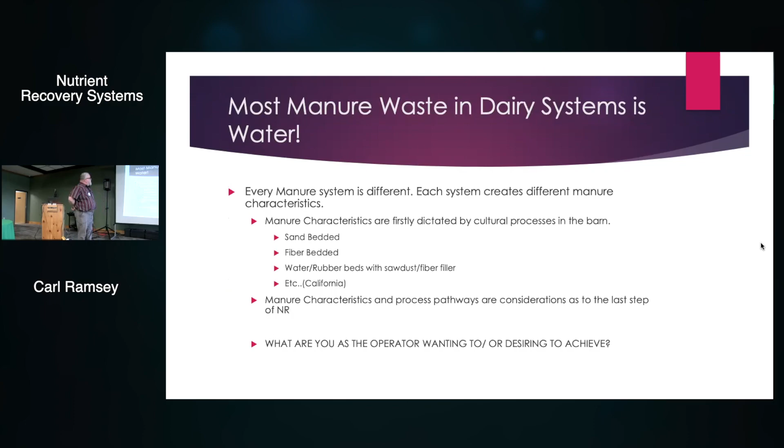The question: to digest or not to digest. Digested manure has had the mucoid structure broken down, making it easier for certain nutrient recovery systems to function. Digesters break down that structure, breaking up the volatile fatty acids, the starches and the sugars, and it allows that liquid to be less viscous after the digester.

Nutrient recovery systems don't want to get slimed up, and certain systems are way more susceptible to it than others. Digesters also serve, and a lot of guys forget about this, as a giant mixing tank, because that's what they are.

Nutrient recovery systems want a very homogeneous feed, because things happen culturally in the barn that change the feed. So if you don't have a digester working as a big blending pit, or a big reception pit doing a good job of blending, and you try feeding it, the difference in just 2 or 3% solids can really mess up your nutrient recovery system. That is also a big benefit of a digester.

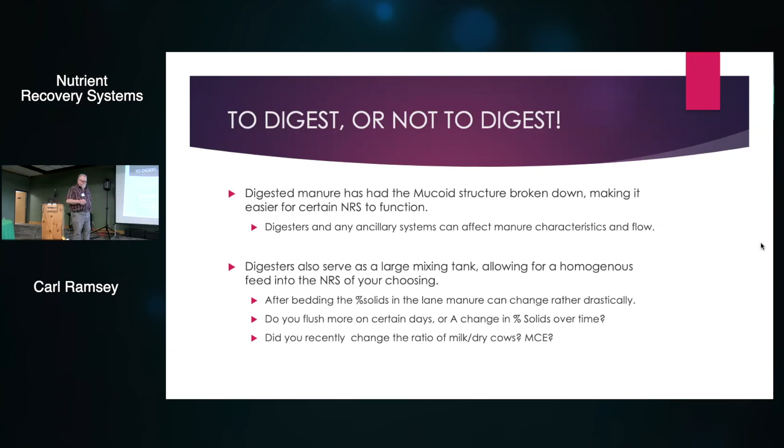The other thing that needs to be decided is how individual process ownership affects the operation as a whole. As companies become aware of what we're doing, they want into our space. The big fuel companies want into our space. Concrete companies want into our space. Trucking companies want into our space. Green investment companies want into our space. Fertilizer companies want into our space.

One of the most common questions I get from people all across the country is, how do we get all these processes to work and not fight each other? Because in a system, you could own the cows, own the digester, own the nutrient recovery system, and own the gas upgrading system. The dairy farmer just wants to get his manure out of the barns or pits to the digester. Well, if the digester isn't running right or isn't being fed at a consistent rate equivalent to what the dairy farmer needs to get rid of, then we've got people upset.

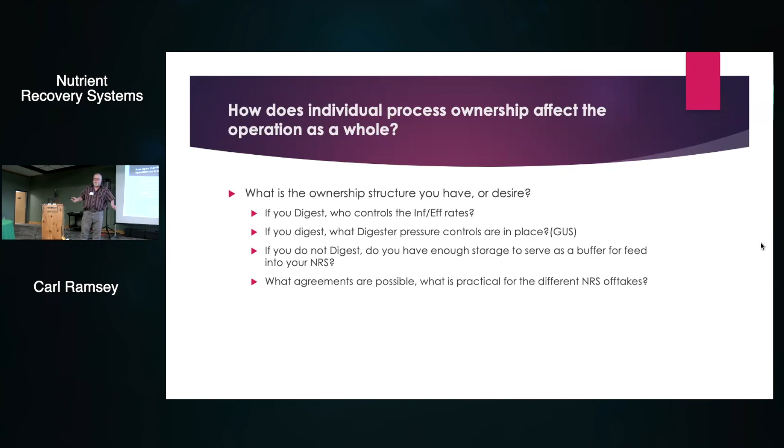And that surge definitely messes with your fiber recovery system. It definitely messes with your nutrient recovery systems after that. So what agreements are possible, what is practical for the different nutrient recovery systems and their off-takes, because again, somebody else could own the nutrient recovery system.

So here's a few in my discussion. I don't know that I hit them all, because our technology today — computers 20, 15 years ago were changing daily and upgrading daily, well now we're in that world with nutrient recovery systems. The technologies used, the off-takes, how we get to where we're getting, it's changing by the day. So I may have missed a lot here. I'm just going to do the best I can.

Micro nano filtration technology, so FO, RO, UF, flocculation, DAF technology to MD presses or centrifuges. That's what we currently are running and have been for a few years. Centrifuges without polymers or flocculants — there's a lot of them being ran. Centrifuges with polymers and flocculants — a few people mess with those. I myself don't like them. Belt or plate and frame filter presses, staged lagoon variations, ammonia harvest to liquid ammonium sulfate, the new Varcor systems.

Hybrid systems that use components together to make a tailored process — one of the systems I'm going to show you is a hybrid system. And then biochar technologies. Folks, that biochar thing is a big deal. I don't know, and there's a lot of smart people that probably do know, but biochar could make a big difference in a lot of ways in a lot of places.

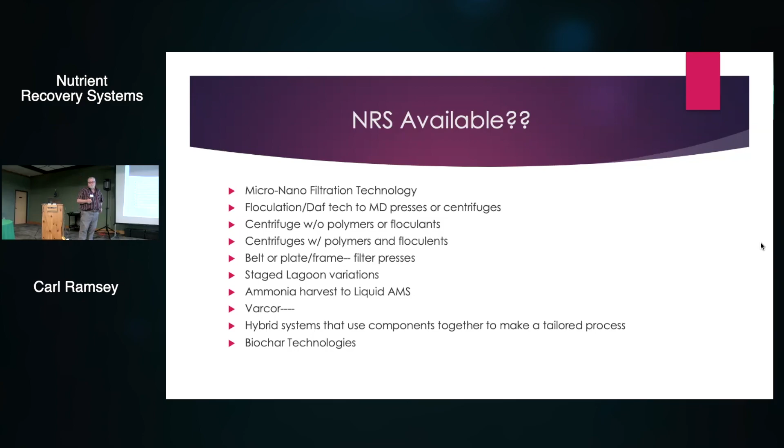So the only thing I can talk about is what I have some experience with, the only thing I feel comfortable talking about anyway. We set out back in 2003 trying to separate phosphorus.

In that process between 2003 and about 2014, we were always running DAF tanks, maybe not very successfully. But in there somewhere, we decided to add a centrifuge to deal with my DAF float, the DAF sludge. It was the worst 18 months of my freaking life. But I'm not going to say it was all the centrifuge's fault, because trying to pump air-entrained manure — and many of you didn't even know that was a thing. I didn't know it either.

But trust me, trying to pump air-entrained manure is very, very difficult. We couldn't find anything that would give me a consistent flow, because every time you tried to pump that stuff and that air-entrained manure was met with any kind of force, rotational force, down force, what happened? The air was trying to escape. When the air tried to escape, the manure went everywhere except for where it was supposed to go. So anyway, again, I hate our experience with centrifuges. A lot of people have no issues with them, and that's probably because they're doing it right, and they're probably not trying to pump air-entrained into them.

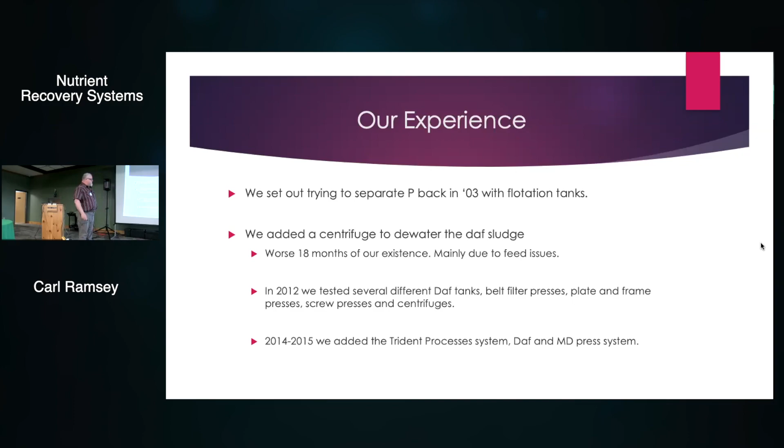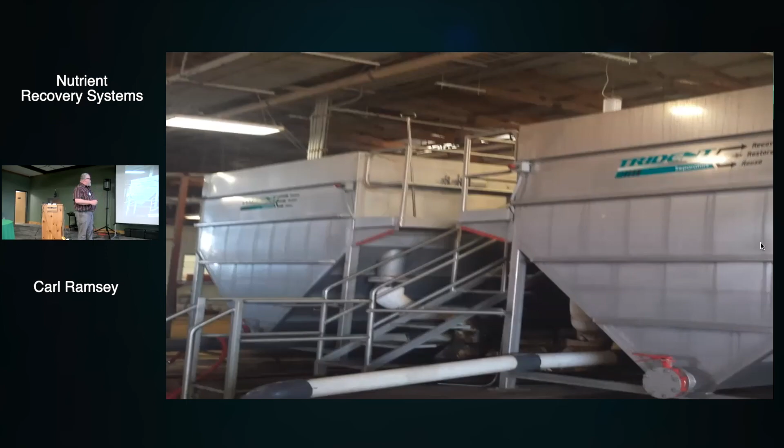In 2014-15, we added our Trident process system, which is a DAF and MD press system. There's a blurry picture of that, and I thought it looked really good when I put it on there. Then I made it a little bigger, I guess, and now it looks really bad. That is about my eyesight, I guess, but still.

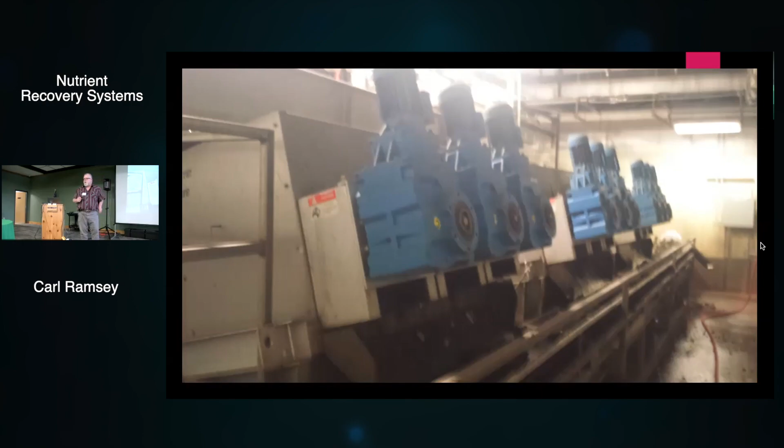These are the MD presses. We went with MD presses to dewater the DAF float for a couple of reasons. There are 9 MD presses, for a total of about 18 horsepower. To dewater the sludge I create every day with the DAF tanks, it would take about 500 horsepower worth of centrifuge. I'm doing the same job with 18 horsepower, saving over $250,000 in electricity a year by using these MD presses.

MD presses don't get a little wobble and shut down. It takes 45 minutes to shut down. MD presses are very consistent. Okay, I like them.

We take that cake that's being made to the north end of our farm, to a fertilizer plant. We agglomerate that nutrient cake with conventional ground fertilizers, and we create a homogeneous blended fertilizer, marketed now with Gypsoil, which is the name of the company that's marketing that stuff.

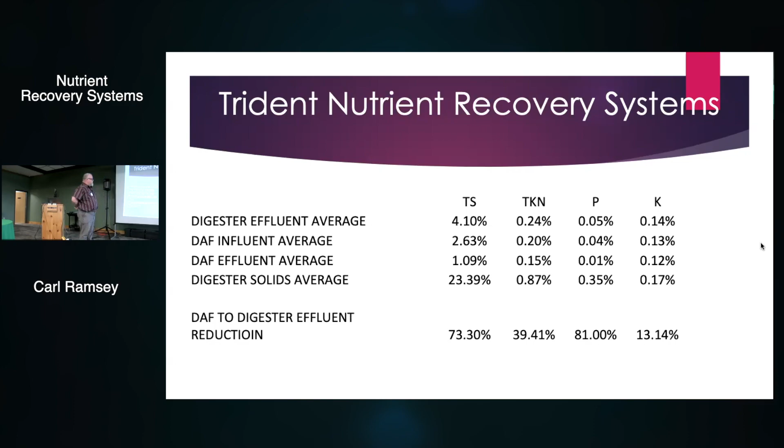One system that has been tested at our facility quite a bit is a digested organics filtration system. They've come in and set up after our DAFs, so they would take the DAF effluent and run it through their systems - UF, ultrafiltration, stainless steel tubular membranes. They get really fancy with the slide they sent me. No internal moving parts, 10+ year membrane life.

They've been successful at it at a pilot level. They're building a huge facility in Wisconsin as we speak. I believe, and you folks may know different, this is the group that got the first discharge permit in Wisconsin. And that's a big deal. Okay.

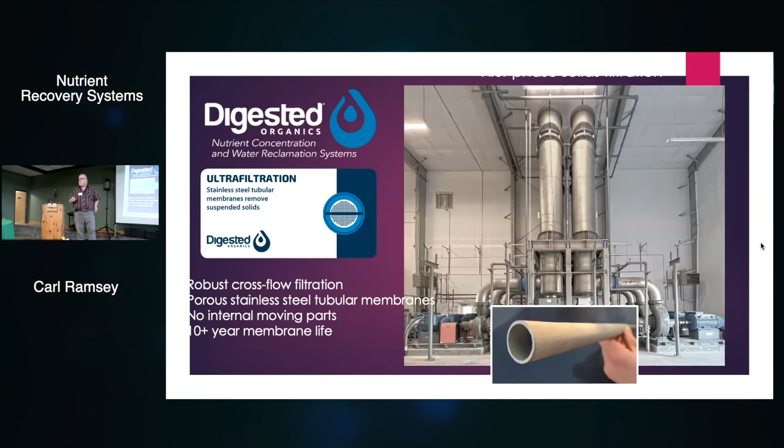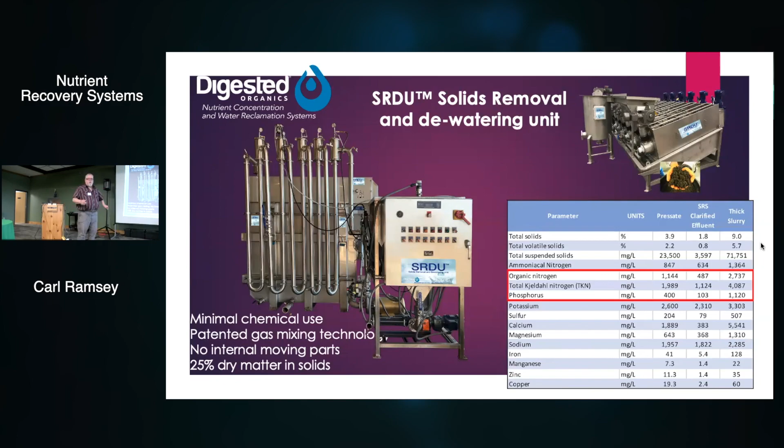Again, you talk about hybrid systems over there in the corner - they call that the SRDU, solids removal and dewatering unit. What that is, is a floc tank hooked to those MD presses so that he can kind of do the same things my DAF tank does. There's a picture of a guy holding the nutrient cake, and then they take the pressate from the MD presses and run it through all of their RO, FO, UF filtration technology. Again, removing 99% of molecules.

Greater than 1 kDa, whatever that means. I really should have looked that up. But I think that's pretty small. Okay.

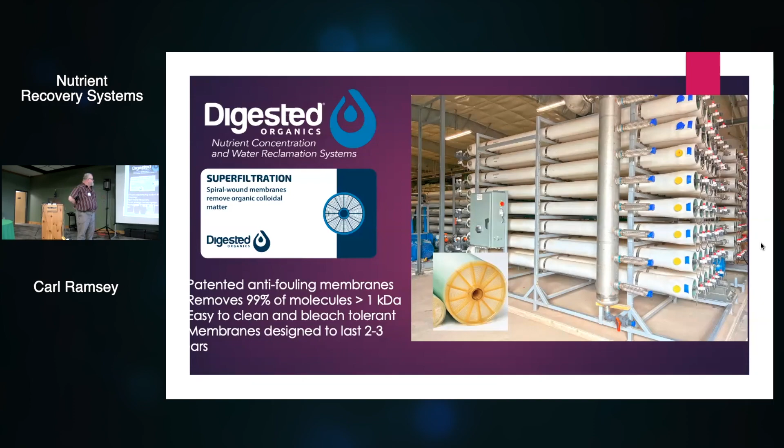So again, I think that's a picture of one of their systems, sub-induction time reverse osmosis. Here's a picture, unique sequencing batch RO technology, okay? Very high water recovery. And here is a picture of the different levels.

And I have drank that water. So they're removing nitrogen, they're removing the potassium and the phosphorus. It's a total nutrient harvest system, and they can create drinking water with their system. Is that what you want? Is that what we need to go to? Time will tell.

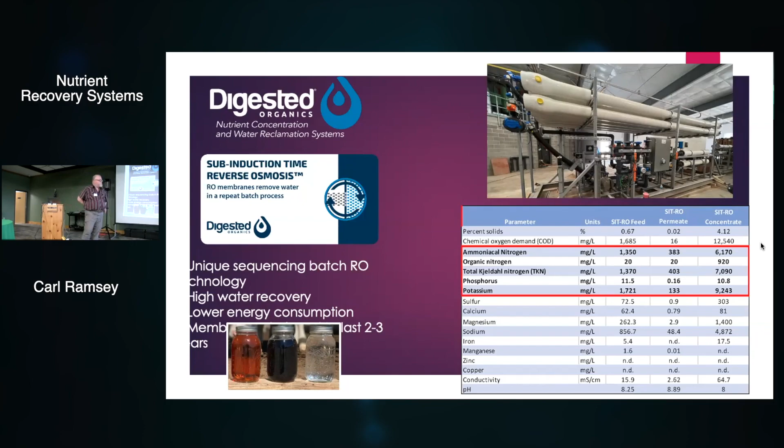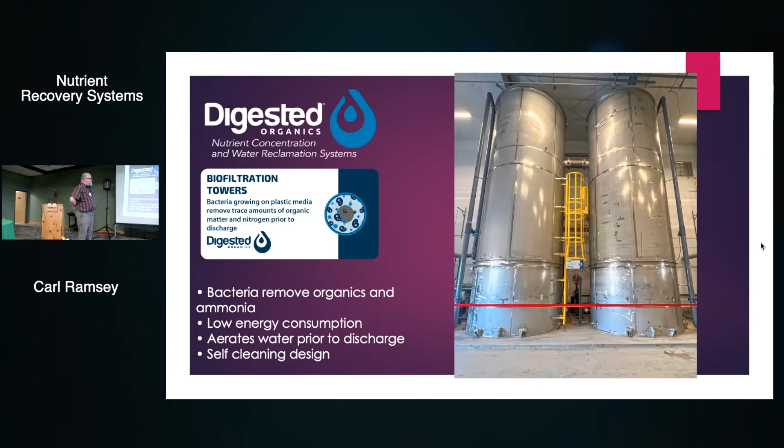There's their ammonia recovery system. It's a stripping tower system with media in there. Everybody's media is different - it could look like little wiffle balls, or it could look like the plastic golf balls, practice golf balls you use. You're looking for exchange sites on the media. Theirs is a self-cleaning design, which is fantastic.

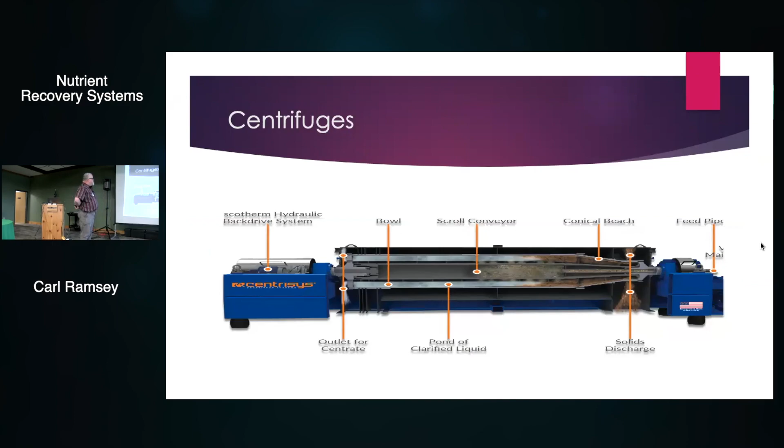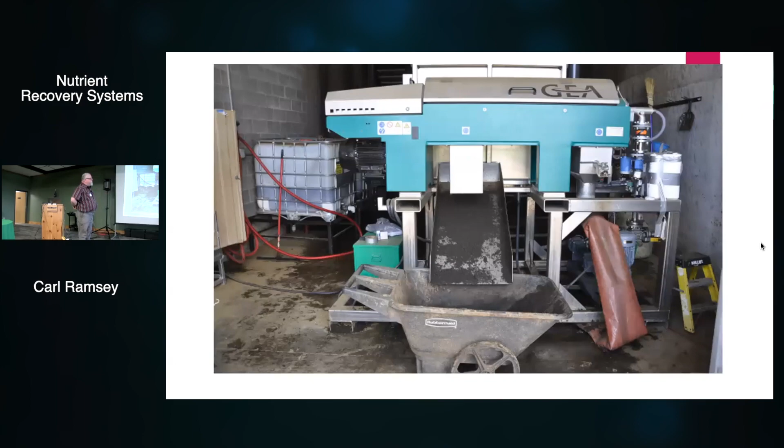Now we talk about centrifuges as one of the options. Okay. This is just a general picture of centrifuges, how they're fed, and it's all about G-force. Here's a GEA centrifuge - I'm not sure what farm that's at, but it's probably one of our sister farms.

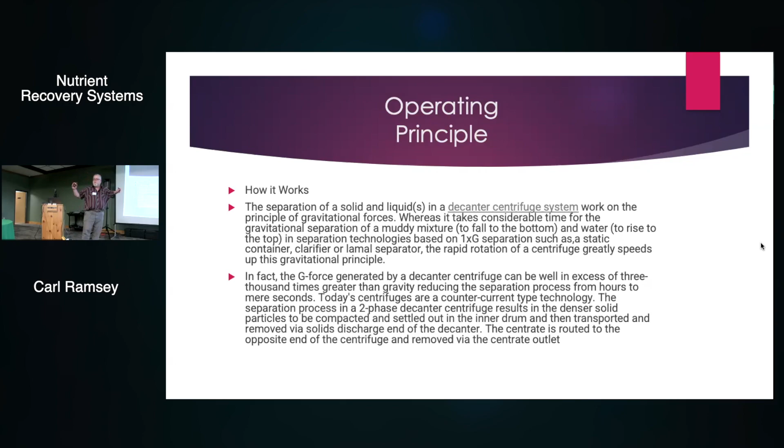You add either polymer or ferric chloride depending on your parts per million, and you can bring that number up. Running a centrifuge with polymer, you've got to use a lot more polymer than what we'd use on our DAF tank systems, because the shear messes with the polymer. It makes it a little bit cost prohibitive.

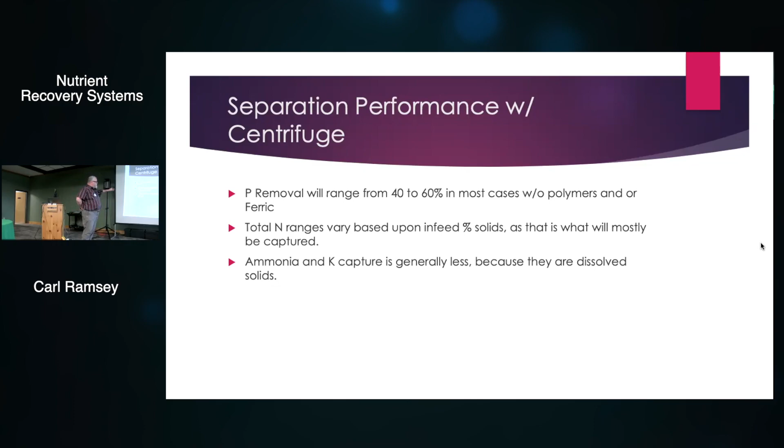Total N ranges vary based upon the in-feed percent solids, because you're generally just capturing the solids, so it would be the organic fraction of nitrogen, not the ammonia. Ammonia and K capture is generally less because they're dissolved solids. I said that a couple different times in different ways.

Full nutrient separation - is that what we're really after? Is your operation need full nutrient separation? Can you recover the costs involved with nutrient separation? By full nutrient separation, I mean go all the way to clean water.

In most scenarios, concentrated nutrients are way more valuable than just the water. The only person in our area making any money hauling manure is the guy hauling manure. The farmer's not making any money on him hauling manure. So we need to concentrate those nutrients so we can increase our value.

Again, monetize manure. Now, people in arid climates might argue that potable, irrigatable water is also very valuable. So a system that takes you all the way to clean water may not be as attractive in the Midwest as it is in New Mexico or California, where people are still shooting each other over water rights, I heard - though you can't believe everything you read on the internet. But either scenario creates value.

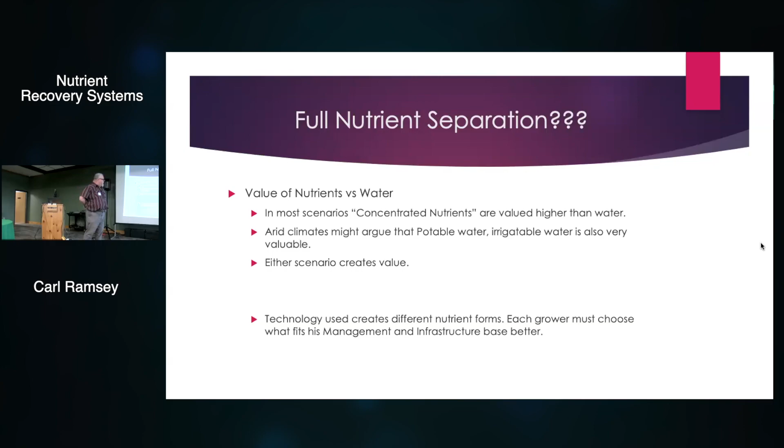Technology used creates different nutrient forms, and each grower needs to choose what is right and fits for your management and current infrastructure base. That brings me to my last technology discussion, the VARCOR system.

We are currently under construction for a 5-unit VARCOR system. It's a complete holistic liquid waste handling system - a combined drying, dewatering, solids removal, and ammonia harvest system.

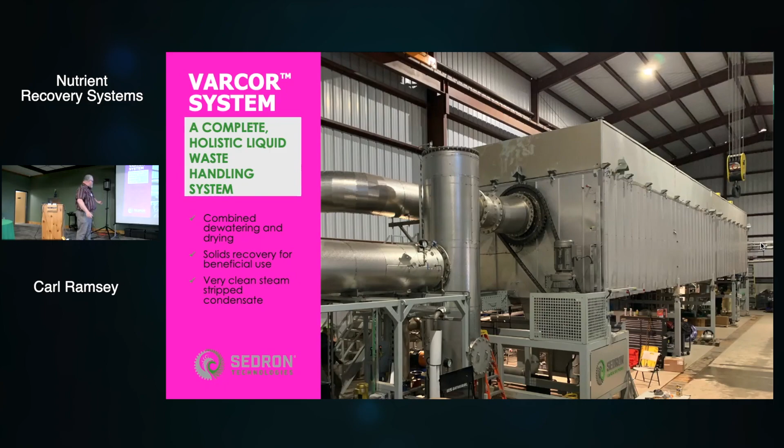A little hard to read, but there's a bit better view. What it does: you put your liquid waste in, and on the end you get dry solids out, aqueous ammonia product, and clean water.

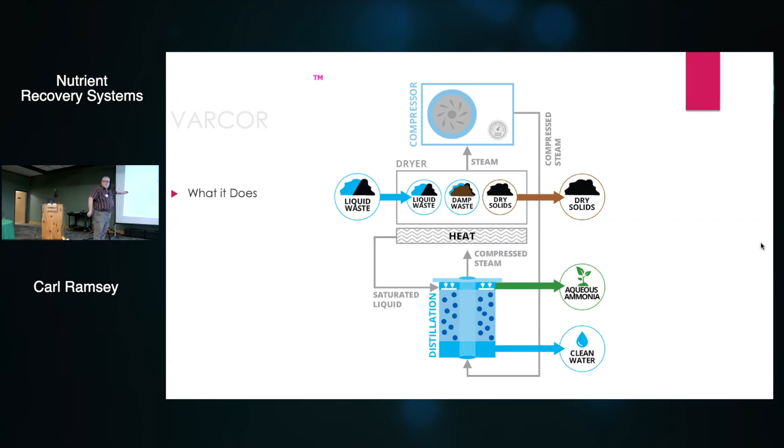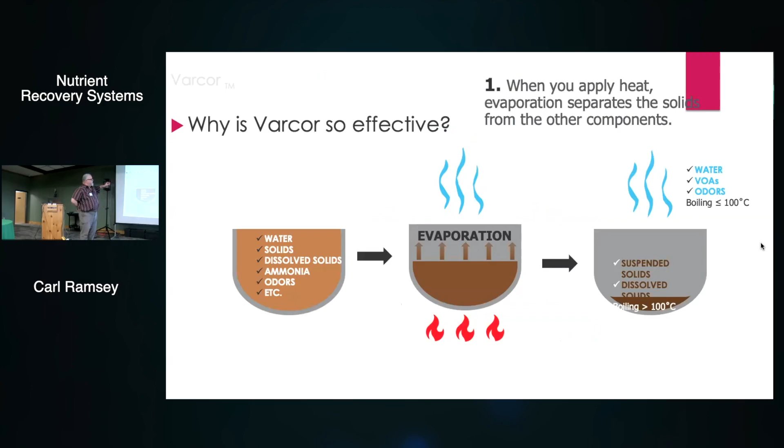The real value - so why is the VARCOR so effective? When you apply heat, evaporation separates the solids from other components, and as it cools, the solids separate at different temperatures, allowing the separation to happen.

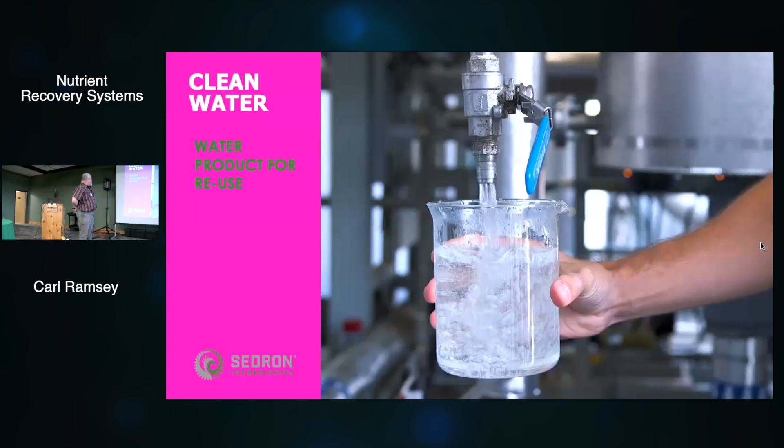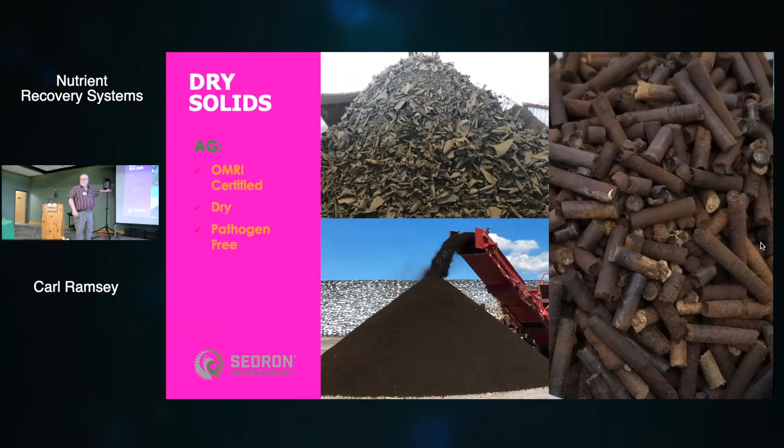It almost looks like leaves - thin, rolled. If you want to go one more process, you can run it through a pellet mill, or just grind it to a powder. It's going to be somewhere around 90% dry matter.

Here's the gold - a certified, OMRI certified nitrogen product. In the organic cropping world, the biggest barrier to yield is first year available nitrogen.

Most organic producers apply nitrogen that is in the organic fraction. That takes, what, 3 years is what science tells us - I'd say it probably takes longer than that to break down. This system makes first year available nitrogen that you can pre-plant or side dress.

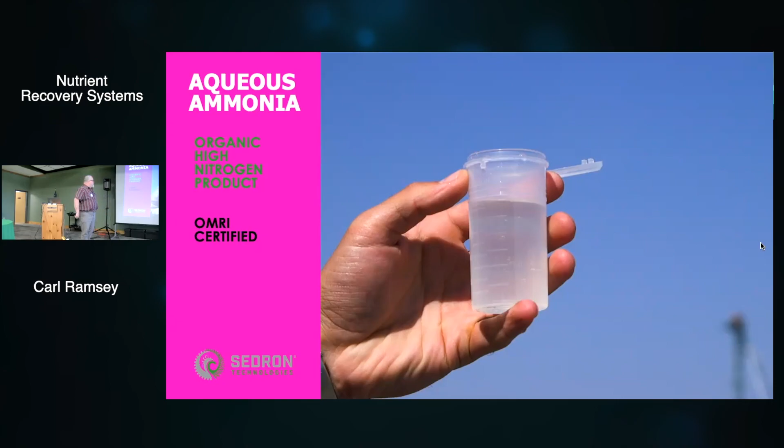The game changer, to say the least. Okay, I don't know what time I'm running on, but I'm in a summary here.

Again, monetize manure - manure managed as an asset. All upcycling processes need to be managed as a system, and that goes back to how many different ownerships may be involved in the entire system. There needs to be a management structure in place to make sure the system runs smoothly and does not detrimentally affect the operations of the individual processes within that system.

I cannot harp on that enough. Again, I'll highlight www.newtrient.com, because that is a technology catalog useful for all breeds, brands, all kinds of technologies - digesters, fiber removal, nutrient removal. If you're starting your search, that's a really good spot to start. I believe they even have people you can talk to - it's not just a website, it's an information clearinghouse. So that's it.